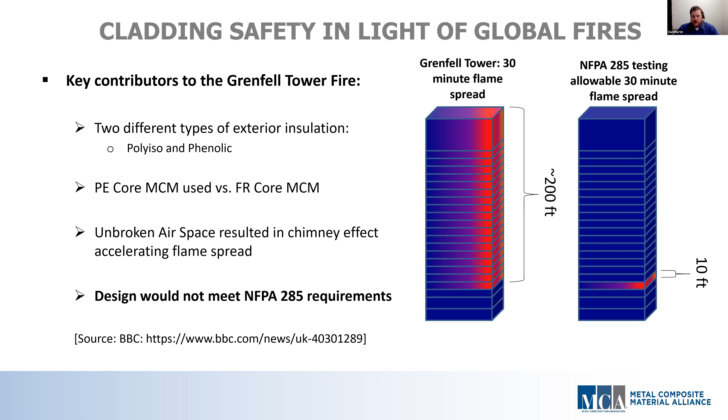Everyone saw what was played on the internet, the newsreels and the newspapers, pictures of fire on the outside, but not many people had a good grasp of what was going on inside. Based on some of the phase 1 inquiry findings, the building itself was not fully sprinklered, so no sprinklers to try to control the room and contents fire that initiated this event. There was only one centralized stairwell for evacuation. Several of the fire doors used for compartmentation were found propped open or did not operate properly to create that compartmentation that the building regulation is based on. Also, the natural gas and electric to the building was not shut off for nearly 23 hours after the fire had started. And some of the fire service tactics chosen right off the bat were shelter in place instead of evacuation of the building. So there's several things that went on that we didn't know of immediately after the fire that we're learning through this investigation.

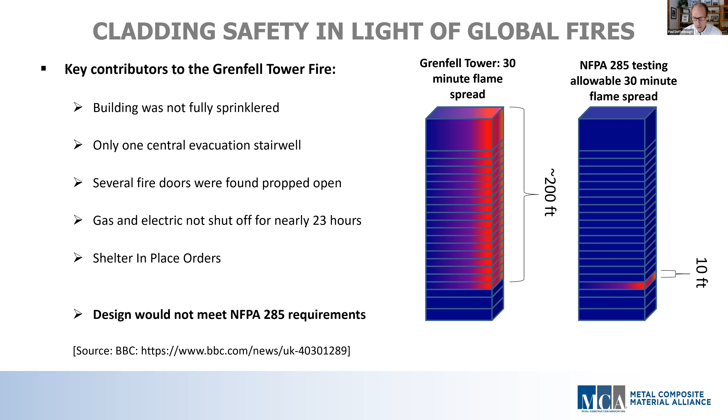Thank you. Hey, let's turn to Andy, who's our code expert on the panel. Andy, can you

Explain if this kind of assembly would meet the requirements of the International Building Code or National Building Code that we follow here in North America? Good afternoon, Paul, and thank you for the opportunity to be part of this panel. The simple answer is no. Back when the first full-scale tests were developed, there was an additional criterion for heat content in the wall. The PE core MCM did not comply with this requirement, and a new product needed to be developed. This was the birth of the FR core MCM panels. Today, in order to meet the requirements of the code, almost all high-rise construction is done using FR core MCM, where the assembly meets the code requirements, including NFPA 285.

So that helps us understand how the Grenfell Tower wouldn't meet our building code in North America. What about other fires, like the ones in Dubai? That one was unfortunately named the Torch Building, which burned twice. Would those buildings have met our code? Yeah, I can imagine the developers wish they had come up with another name rather than the Torch Building, but the answer is still the same. PE core panels were used on all of these other projects. If the projects had been built in North America, the PE product would not have been allowed for use, unless there was some way found that the wall assembly could meet the requirements of the current code.

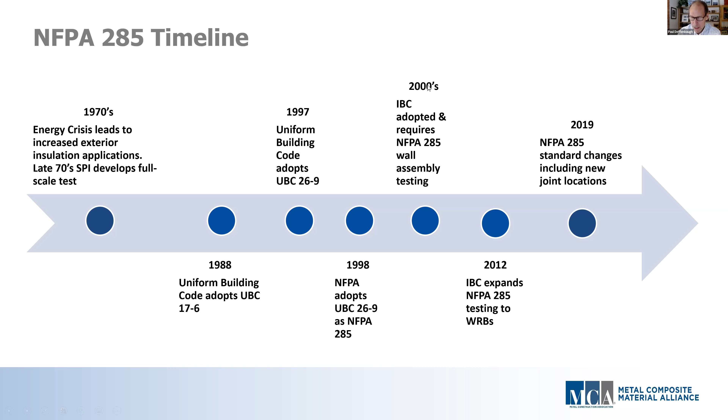Hey, thanks, Andy. I keep hearing that word combustion in your answer, and maybe it's beneficial for us to dig into that and understand it a bit more.

Webster's defines combustion as able to catch fire and burn easily. Is that what it means when it comes to building materials, Dan?

Yes and no. It depends on which code you're actually looking at. The definition of how you determine combustibility varies. The codes differentiate the allowable uses of a material when it's combustible versus non-combustible, depending on the situation and the building. So it's important to understand how the code determines when a material is considered combustible versus non-combustible. So it's kind of yes and no.

So in the code, what does define combustibility? Well, it depends on the code. For example, I'll look at the IBC, the International Building Code. There is no specific definition for the term combustible in the definition section. So when that occurs, you revert back to the definition per Webster's dictionary.

That said, if you look in IBC, there is a section where a material can be considered non-combustible if it is tested to ASTM E136 or ASTM E2652, and you meet the acceptance criteria of E136. So ultimately, if you fail the ASTM E136 combustibility test, a small scale test that looks at the material itself, you're considered combustible. But there are quirks and exceptions in every code, like gypsum wallboard, which has a fine exception, but you're generally looking for that ASTM E136 test result.

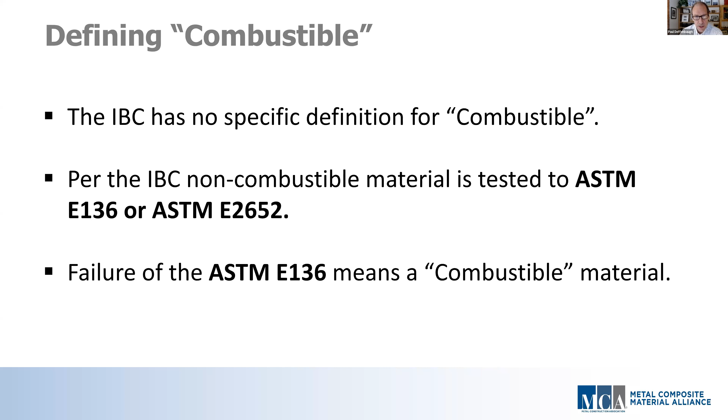So what's the NFPA's life safety code definition? Yeah, so if you look on the other hand at NFPA 101, which is the life safety code used in various states, I know there's some in the Northeast.

And in healthcare, it gives a more building environment specific definition for combustible. You have it, which is a material that in the form in which it is used and under the conditions anticipated will ignite and burn, a material that does not meet the definition of non-combustible or limited combustible. NFPA 101 also uses the same two previously mentioned standardized tests to determine non-combustibility. So we're looking at a material that in the form in which it is used and under the conditions anticipated will ignite and burn. So a little bit different than the Webster's dictionary definition, which gives you an idea of how things change between the codes you're working with.

Dan, give us some examples of non-combustible materials and combustible materials we might have around us and encounter frequently.

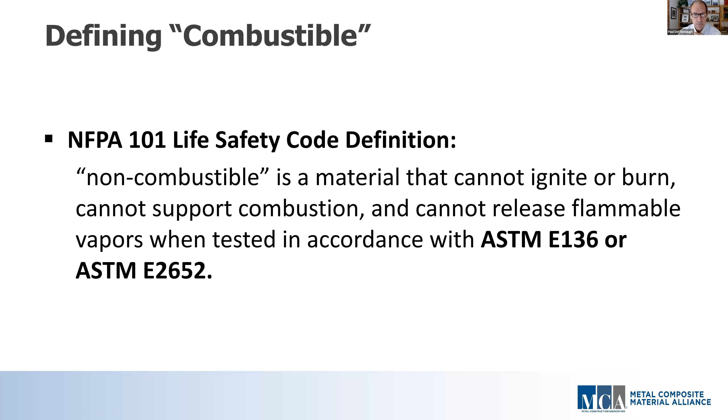Yeah, absolutely. So let's start off with non-combustible: your concretes, your steels, some of your mineral wool insulations, aluminum, spray fireproofing, the SFRM you see on steel, cement fiberboard, natural stones, clay brick, etc. Those are your non-combustibles.

Now on the flip side, the combustibles: your wood, your fire retardant treated wood, also known as FRTW, foam plastic insulation, water resistive barriers, PVC pipes, carpeting, furniture, the clothing you're wearing, high pressure laminate veneers or HPLs, EIFS systems, PE core and FR core MCM panels, polyethylene core. That's what you're seeing in the built environment, a couple combustible examples.

So I think I know the answer to this question, but are all combustible materials the same? Do they each have the same amount of flame propagation potential? Excellent question, Paul. Absolutely not. Flame propagation, also known as flame spread, and combustibility are two completely different concepts. Every material ignites and burns differently, and we need to evaluate that.

So in some instances, the combination of two different burning materials will result in a flame spread that is drastically different than if I was burning those two same materials separately. For example, in exterior walls, we have MCM panels and we evaluate their flame spread with NFPA 285. In that test, we're evaluating them as a combination of materials.

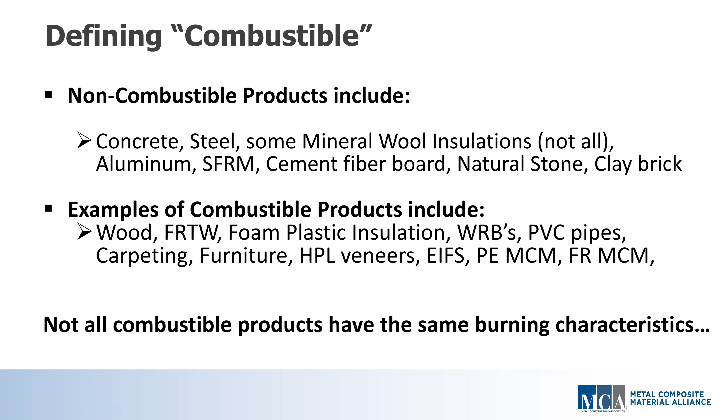Yeah, no problem, Paul. Sure thing, I'll go over that, hopefully you can hear me well. I had to turn off my video, I'm having a little internet connectivity issue, but FR stands for fire retardant. Oh wonderful, FR actually stands for fire retardant, not fire resistant. This is commonly confused, but there's an important difference there. Fire retardant core not only burns more slowly, but it actually retards the flame due to how the core is made up. So how is a fire retardant core made?

Nick, did we lose you?

Nick, are we able to catch you? We're catching you. It's a little off and on, but let's continue if we can.

Does the FR material burn? So yes, it will burn if it's subjected to a fire source, such as the gas burners in an NFPA 285 test. The FR core will burn slowly, and it's designed to self-extinguish once that flame source is removed. I believe we'll be showing a video of this later, and that will definitely help demonstrate this powerful characteristic of the FR MCM.

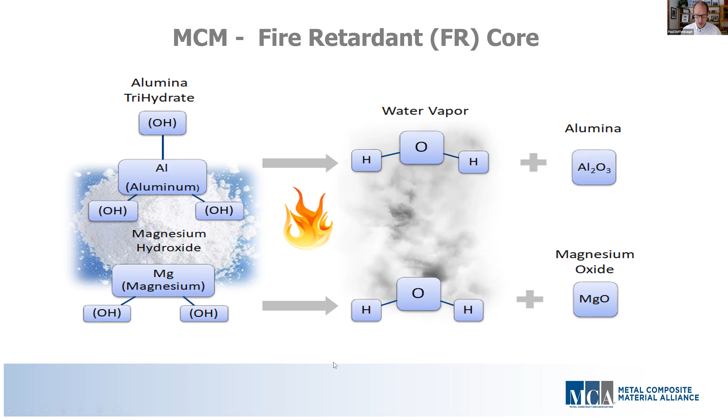Thanks, Nick, very much. You mentioned the NFPA 285 test in your response. We've been talking about it, and I think it's probably beneficial for us to get into that testing procedure a bit more. Dan, let's start with the basics. What does the NFPA 285 determine?

As Andy talked about previously in his history of NFPA 285, it's the standard fire test method used to determine vertical and horizontal flame spread of exterior wall assemblies that contain combustible components. It's right there in the title. We're evaluating the flame spread across the face of the wall, within the wall cavity itself, and also from floor to floor.

Flame spread per the test standard is limited vertically to 10 feet above the window opening, as Andy said, and laterally either side of the window opening center line by 5 feet. So the key word here that I want to keep emphasizing is that this is an assembly test. This is not a component test. We are looking at the assembly as a whole when doing an NFPA 285 test or evaluation.

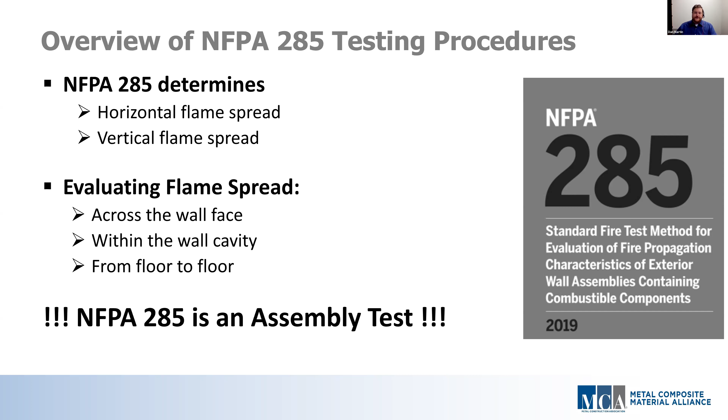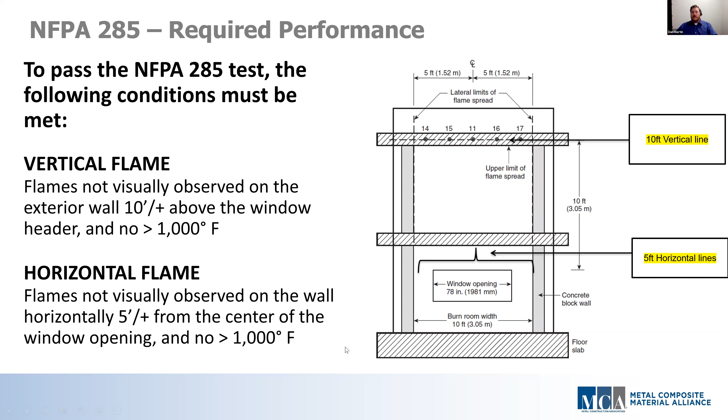So what kind of test is it, and how's it set up? This is an intermediate scale test that is evaluating the exterior wall assembly flame spread performance when exposed to an interior fire that has become fully developed, or post-flashover, with a fire plume that is breaching out of the opening in the wall. As you can see on your screen, it's got two levels to it—the lower level being the burn room, and an unoccupied room on the second level.

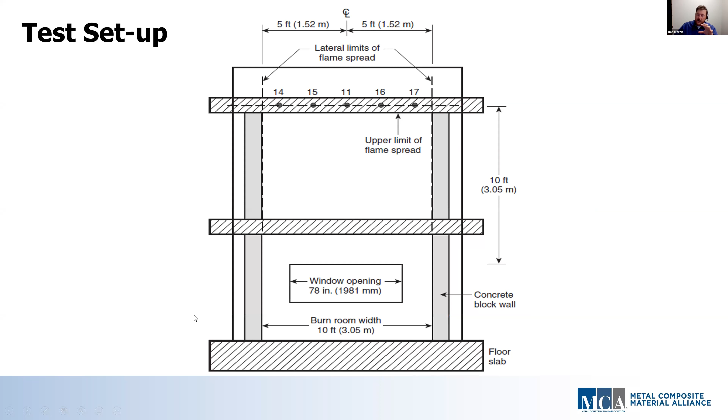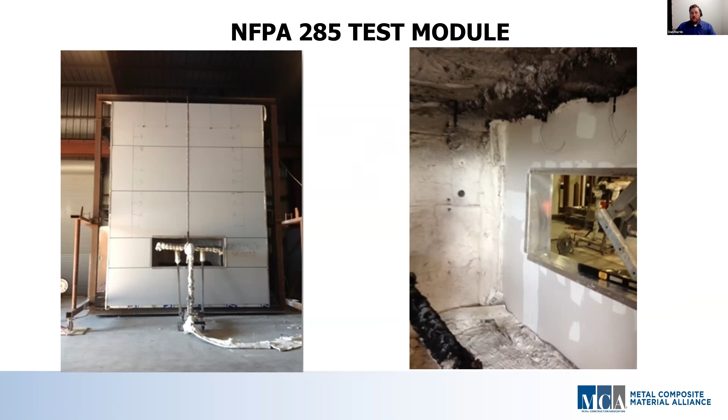This 30-minute fire exposure is achieved via two burners. In this picture you can kind of see both of them. On the left-hand side you have the window burner, and in the bottom left corner of the right-hand photograph you can see the burn room burner. So we have that burn room on the first level, and then the second window burner, which is outside, lining up with the front of the window opening.

What this setup with two different burners does is expose the interior face of the wall and the exterior face of the wall at the same time, so we've got that thermal insult from the inside and the outside.

So we're evaluating this flame spread in concealed spaces that we can't see with the naked eye using thermocouples. We're getting temperature measurements at numerous locations within this assembly itself and within the room above the burn room to understand where the fire is going. These temperature readings are used to determine the progress of the flame spread based on the temperature thresholds in the test standard when we can't see those fires.

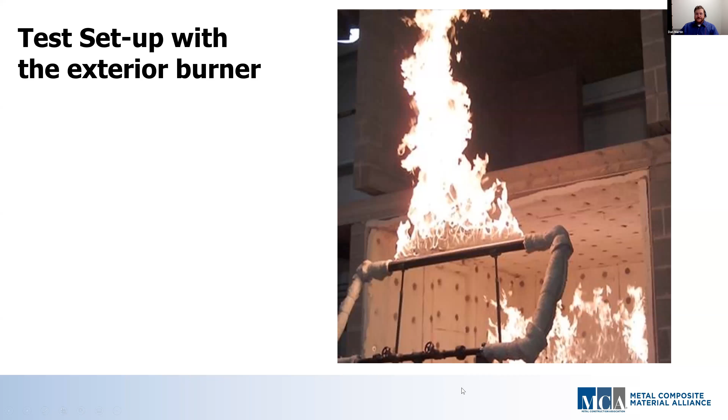So you mentioned this is a two-story test. How's the second story involved in the test? Yeah, that's correct, Paul. We do have two stories in here for a purpose, for a reason. We want to ensure that we have life safety and we're maintaining life safety for the people that could be occupying that space above the fire. We want to make sure that heat, smoke, and flames are not allowed to enter that second story.

Now, there's a couple locations this can happen when you look at a slab edge and wall interface where that fire can get back into the floor above. Obviously, you can get into the wall cavity and burn vertically up within the wall cavity and then burn back through into the room above. You can also burn a hole through the entire cross section of the wall. So you've got flames coming out from below, it goes up the exterior face and then burns all the way back through. And then we're also looking at that edge of slab.

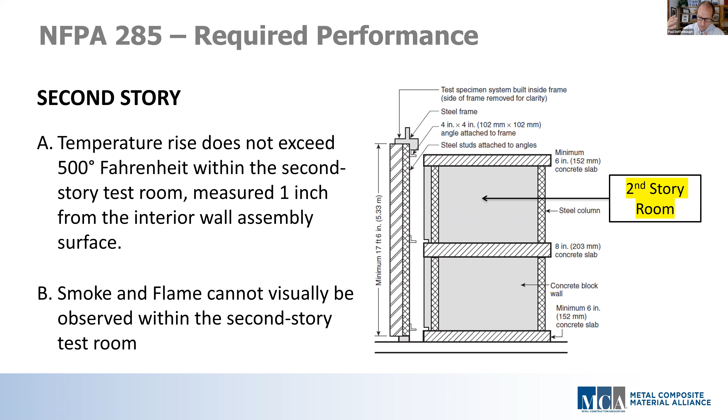Now that's a whole different fire test standard, but that's a location we look at. Once again, we're looking via video and thermocouples to monitor those conditions in the second story to make sure that we don't have 500 degrees above at the edge and we're not getting any visible smoke in that space. So if the flame and intense heat goes beyond 10 feet, that's a failure.

Give us a comparison here. If you were to use a non-combustible material like concrete, how high is that flame and heat spread going to be? So as you said, we're going to take a concrete wall, nothing on it. What kind of visuals can we see based on the window burner and all that stuff? Just make sure I'm understanding your question. Yeah. The window burner itself will generate a fire plume of about 5 to 6 feet at the end of the 30-minute test. So you're getting 5 to 6 feet of flame extension just from the window burner itself.

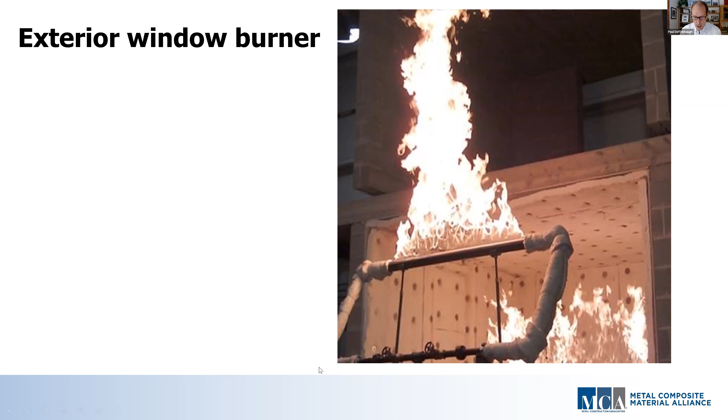Thanks. You keep saying assembly test. What does the NFPA 285 assembly test mean, and how is that different from a product test?

So when someone conducts an NFPA 285 test, you are evaluating the exterior wall assembly as a whole. This doesn't look at a singular component. We're evaluating all the exterior wall components at the same time during this test, from the interior gypsum wallboard into the studs and the stud cavity space. We're evaluating the exterior sheathing. If there's a continuous insulation on there, we're looking at that continuous insulation and how it burns in conjunction with everything else. Even the air cavity space. In this example you see on the screen, the air cavity space between the backside of the MCM panel and the exterior face of the insulation all comes into play.

Geometry, we're looking at this. And then obviously we're looking at the veneer system itself. So a holistic inside to outside evaluation. And as we've discussed before, a single burning material will behave a given way. But as we start to stack things up and we add geometry and we start burning multiple materials together, there's significant changes to the flame spread and the burning behavior of those materials.

Now, in a product test, as I said, the only burning material in play is that product itself. These product tests are typically smaller in scale. They do not incorporate a large amount of material in its actual end use field condition. And when you look at it that way, that's why it's so important to look at the assembly test and why NFPA 285 is the approved method within the code for understanding and qualifying the fire performance of the entire wall assembly.

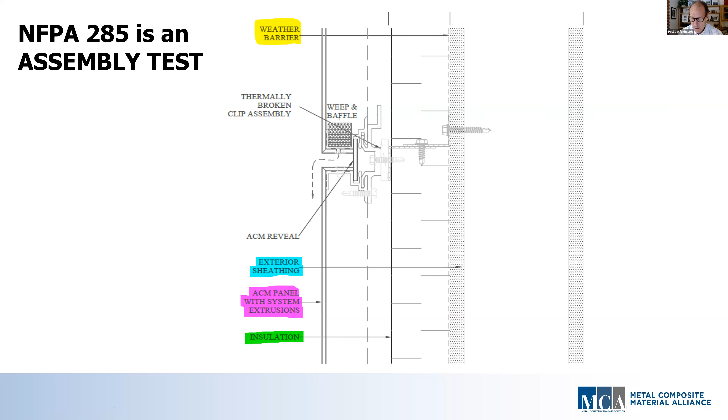All right. I think it's probably helpful for us to see one of these tests. Nick, I think you've got a time-lapse video of one of the tests, and if we can cue that up. Nick, why don't you walk us through what we're seeing here in this? Yes, absolutely.

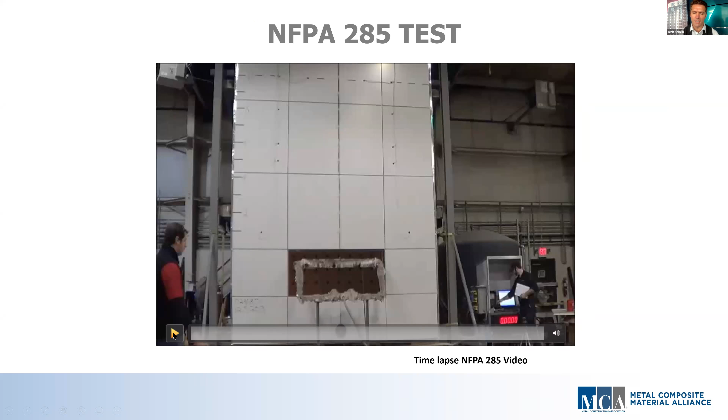Seeing the actual test definitely helps us understand it. When we hit play here, this is an accelerated time-lapse video to allow you to see what happens. It takes the full 30 minutes plus 10 minutes to the post-burn.

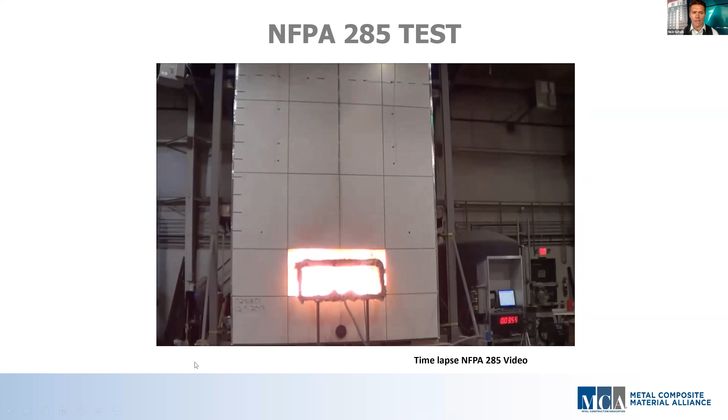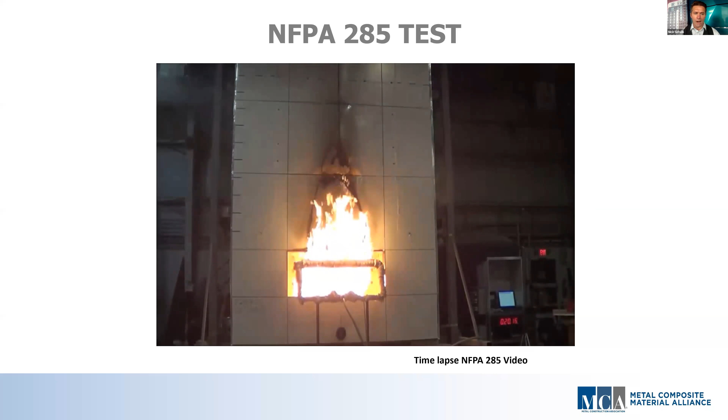Right now, they have lit the interior burner, and here in a moment you're going to see the flames really pick up. They have lit that outside burner, and that's what's causing those flames to get a lot higher. As this test progressed, they're adding more and more fuel to the fire, literally increasing the gas flow so that those flames coming out of the burner will end up being 5 to 6 feet high, regardless of what material is on that wall. This simulates a real fire condition of that fire continuing to increase in intensity.

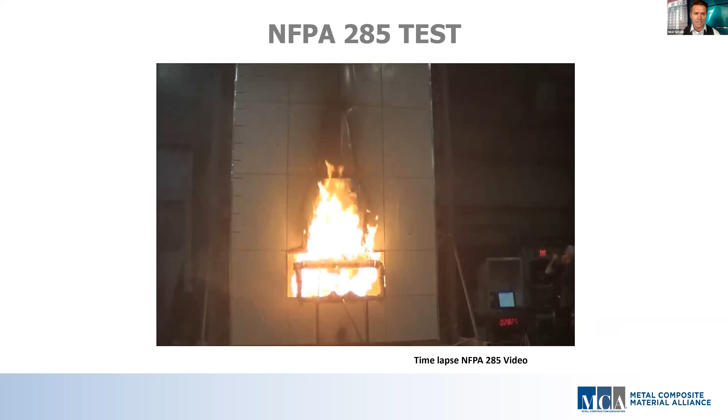As this goes on, you can see it is melting away and burning away the materials above that test, above that burner, directly where that's at. This goes off here in a moment. Once they reach the 30-minute test, you can see quickly how the fire went out.

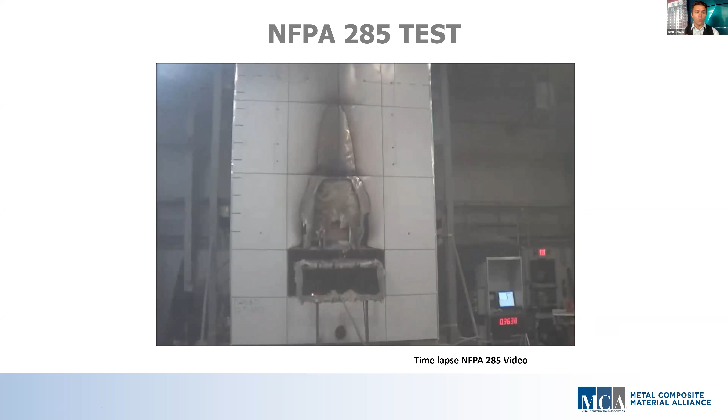I think it's a really important part of noticing what that FR material does. That went out because there was no more fire source, flame source. There were no sprinklers used. There was no fire extinguishers used. And this best demonstrates that fire retardant property of FR-MCM. The material is designed to self-extinguish, and that's why it releases that water vapor. That's what we just witnessed here at the end of that test.

Thanks, Nick. I always love seeing that video.

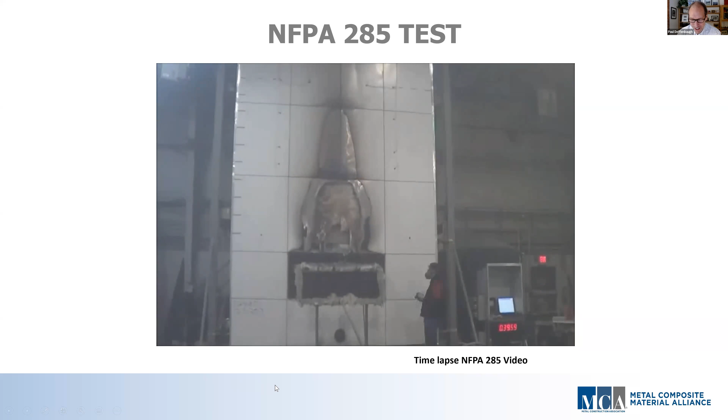Dan, now that we understand these individual components of the wall matter, can you tell us about WRBs and insulation and how important they are and how they can impact the NFPA 285 test? And in particular, are they pretty equal, or does a particular type impact the testing?

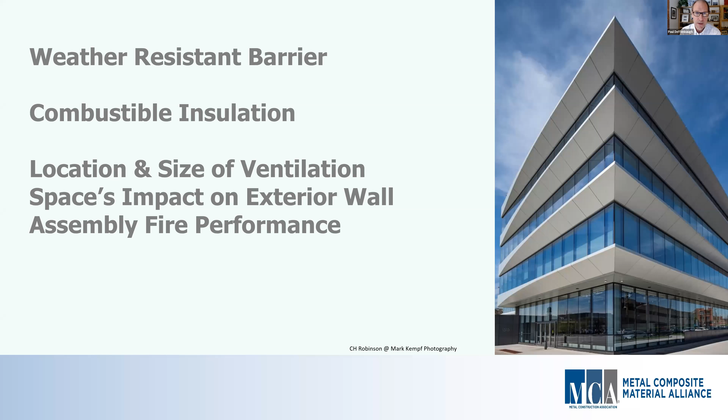Sure. For starters, there are several different types of water resistive barriers, or WRBs, out there, and tons of different manufacturers on the market. The same holds true for insulation materials. These water resistive barriers typically cover the entire exterior wall surface, and they can account for a large amount of combustible material within the wall assembly. Just because they're not visible from the street doesn't mean we can ignore them from a flame spread and fire performance standpoint.

They all burn differently, and they have different intensities when you look at them. There are three main types of water resistive barriers: fluid applieds, which basically spray out of a giant bucket; self-adhered sheet goods, which have a tacky backing that sticks to the wall; and mechanically fastened sheet goods, which just roll out and staple to the wall.

Based on a lot of our in-house cone calorimeter testing, you see that the fluid applied WRBs tend to burn longer and hotter and have more potential energy than the mechanically fastened sheet goods.

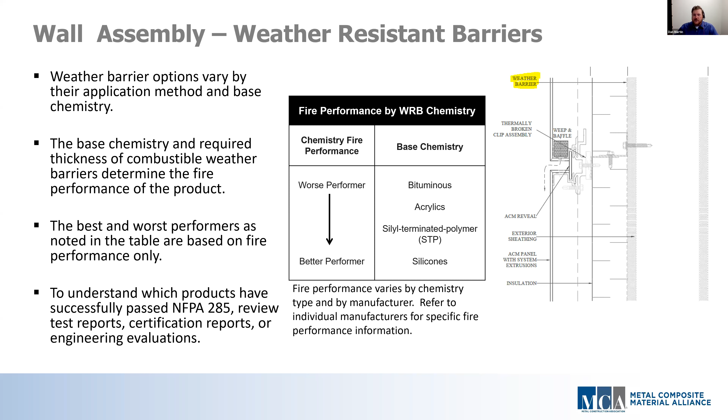When you look at more of the exterior insulation materials, this could include spray foams, EPS, XPS, polyiso, the mineral fiber or mineral wool insulations, and they all perform differently under fire conditions as well. Some will melt, some will drip, some will flow, others form a protective char layer and burn very slowly. If you look at some of the mineral fibers, they just slowly decompose as they burn, and some of the organic binders burn away.

Based on our years of testing and observing 285 tests and seeing them work in conjunction, the spray foams tend to be the worst performers. Then you get into the EPS and XPS foams, and as you work your way down, you get into your polyiso and mineral fiber.

Now, with basing experience, and we'll get into this later, of how we learn about combinations of materials, we know that if you take a spray foam or EPS or XPS insulation underneath an MCM panel, there's a 99.9% chance that you are not going to pass NFPA 285. We know that those combinations of materials just don't jive well together.

That's a lot of really helpful material, thanks.

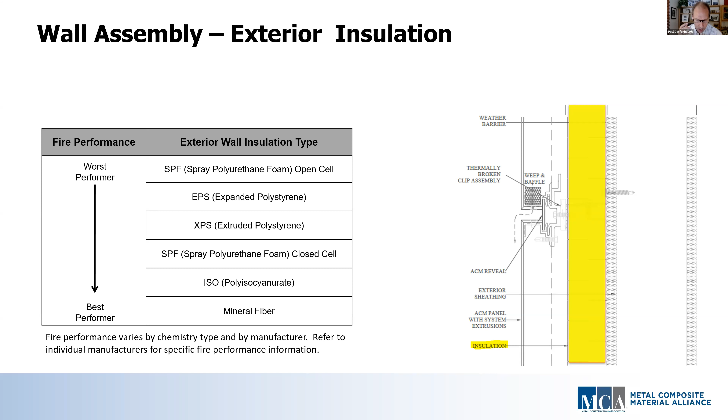But now I think the question, and what I'm wondering is, when is this testing required? So Nick, help us understand what triggers the NFPA 285 test.

You're on mute there, Nick.

Yep. So Paul, you're right, it is a lot of information and it can seem quite confusing. Ultimately, NFPA 285 is referenced in two different sections of the code. In Chapter 14, it addresses facades and weather-resistant barriers, whereas Chapter 26 addresses foam plastics, which is the insulations that Dan was mentioning. It can feel a little bit like a maze, but there are a few easy questions you can ask yourself to get going in the right direction. I think this would be a great time to hand this over to Jeff Henry to walk us through that decision making. So Jeff, can you walk us through the series of questions you would ask to determine if NFPA 285 is required on a wall assembly?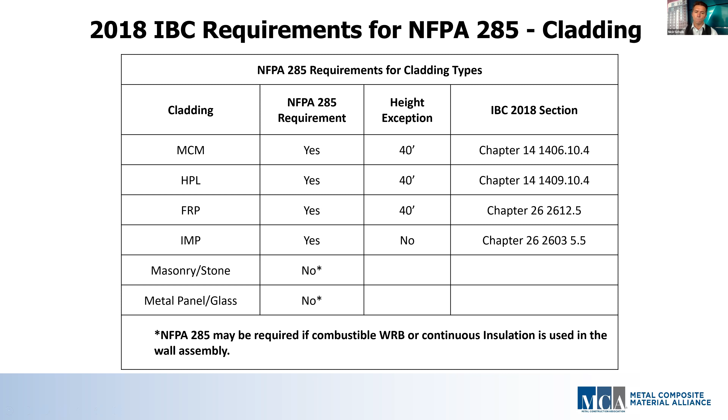Thanks, Nick. As the MCM system fabricator, one of our jobs is to ensure the wall assembly meets code. The first parameter to consider is building construction type. If it's non-combustible construction, types 1, 2, 3, or 4, then NFPA 285 must be considered. Next, I look at what's going on behind the MCM system. Is there insulation outbound of the sheathing, and if so, what type? If it's foam plastic insulation, then NFPA 285 is required. If there's no insulation outbound of the sheathing, I look at the height of the building. Simply put, if the building is 40 foot or more above grade, then NFPA 285 is a requirement.

Thanks, Nick and Jeff. That seems pretty straightforward, but I noticed you mentioned some exceptions. Nick, what do you recommend to the audience if they have questions on their wall design? Yeah, I recommend that you reach out. We have MCM fabricators, our MCM sales representatives out there in the field that are there and paid to help with design questions and questions around this. I think Jeff would say the same around the fabricators, they are very educated and can answer questions. You can reach directly out to the MCM Alliance and would be happy to answer the question. Our goal is to help make sure that we're maintaining that life safety as required in the IBC when you're designing with these great materials.

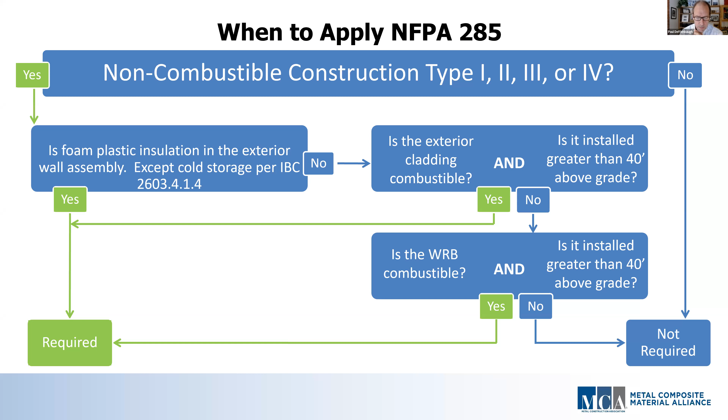So we've covered NFPA 285 in quite a bit of depth. Jeff, are there additional building code requirements for MCM cladding? There is, Paul. ASTM E84, often referred to as just E84, is the standard test method for assessing the surface burning characteristics of building products. It's a test that's been around for decades, and measures both flame spread and smoke developed of individual components used in a wall assembly. The results of this test classify material as Class A, B, or C. Class A material is required for high-rise construction, and materials that do not meet this classification often have difficulty passing NFPA 285 testing. The downside of E84 is twofold: the test is horizontal, and we know that critical performance is determined when material is in a vertical orientation. Also, the test is done on individual wall components, as Dan has mentioned numerous times, and there's no way to determine the fire interaction between individual components when using this test. That's why the benefit of 285 is that it's an assembly test, and it takes both of these real world conditions into account.

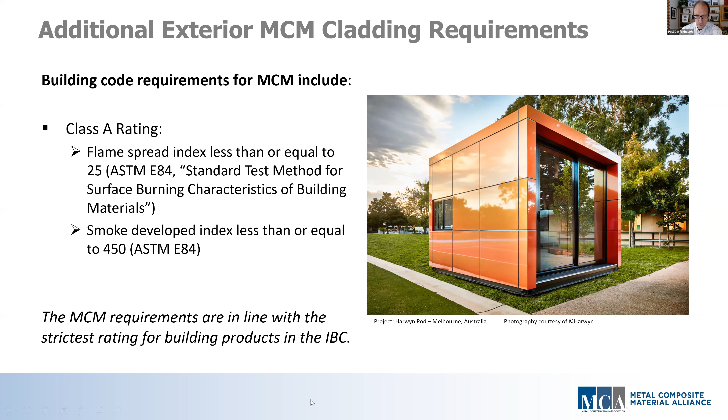Andy, you've been in the industry and part of the Metal Construction Association for a number of years. What's the MCA and the MCM Alliance done for the safe use of MCM? Well, Paul, the MCA and the MCM manufacturers are focused on performance and safety. The best example I can give you goes back to 2000 and the initial MCM section that was put into the International Building Code. We had a section called alternate conditions, where limited use of MCM above 40 feet without testing to NFPA 285 was allowed, based upon how other combustibles like wood, vinyl, and plastic glazing are used in the code. After more than 15 years in the code, this section still proved very difficult to understand and use correctly. Even though limiting criteria like MCM panel size, panel separation, and percent of wall covering was very restrictive, the section continued to be misapplied. In the development of the 2018 International Building Code, the MCA proposed that this section be removed, even though the MCA was involved in getting it in the first place. This change was welcomed and included in the 2018 International Building Code.

Another development by the MCM industry that started back in the 1980s was to develop something called an acceptance criteria for MCM.

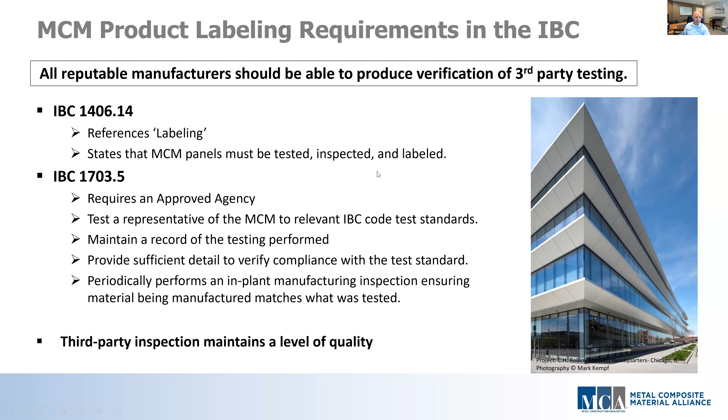And Nick, Andy also mentioned third-party testing and code compliance reports. Why is this important? Well, Paul, again, it is in the IBC and it's in section 1703.5. So that section comes up again, and third-party inspections are required. And really it's to maintain consistency and a consistent level of market offering.

So I look at it as basically a trust but verify type situation. A third party visits your manufacturing plant annually and they reevaluate that the material you're producing is the same as that you had originally tested. If you change anything in your product, such as the core or any other component, a third party must validate that it still meets those same building codes.

So sometimes you have a small change to your product and you actually have to go and retest them. And that's good to make sure that we're performing as well as we need to. An example of this is an ESR code compliance report. And the code requires tests in the IBC to be performed to the highest standards through an accredited third-party agency. So again, this is a code requirement. And really, all credible manufacturers should be able to supply up-to-date third-party compliance reports.

It definitely seems like a good thing for manufacturers to produce what they are marketing. I want to switch to a topic that I would like to touch on now, which is passed or approved wall assemblies. Dan, does every wall need to be tested? It seems kind of impossible given all the potential designs.

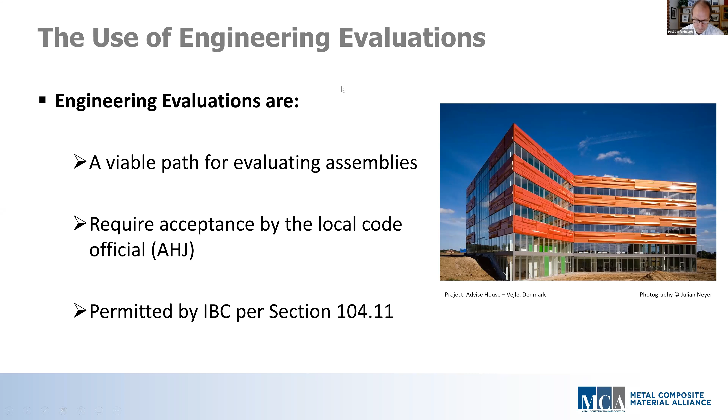Thanks, Dan. So last question. What is your one major takeaway for trusting the NFPA 285 and its passed or tested assemblies? Let's start with you, Andy.

Well, I guess having been in the MCM industry for such a long time gets me to the front of the line here. I've been working with MCM and testing since 1986. And my one takeaway is that NFPA has been used for decades to show wall performance when exposed to breakout type fire. This performance standard has proven to be very accurate, and we have not seen any major fire involving a tested assembly. Could we choose or create a more difficult standard? Of course. But we have no experience that makes us concerned with using the results of NFPA 285 as an indicator for MCM performance on high-rise construction. Now, if we had more time, I could list a bunch of takeaways, but I'll give someone else a chance to add to the list.

Nick, how about you next? Oh yeah, so I'm going to reiterate a point I made earlier, Andy, because I do find it so important: everyone, we're here to help. If you have questions or need assistance, please reach out. Reach out to members of my team, members of other MCM manufacturers, the sales representatives. They have lots of information. If not, they know where to go get it.

On top of that, your local trusted fabricator, they're there for you. They're there to help work, and again, they want to make sure we do things right. And lastly, a plug for the MCM Alliance here. You can reach out to Andy directly or the group in general, and we can get back to you with professional advice, or even the fire engineers such as Dan and his team and the others. So lots of people around to help make sure that we're doing things right and we're keeping North American cladding safe. We understand the code can sometimes seem confusing or difficult, or maybe you just need that reassurance that you did do it right. We're happy to help you there. So make sure to reach out and let's keep on designing walls in a way that promotes that life safety.